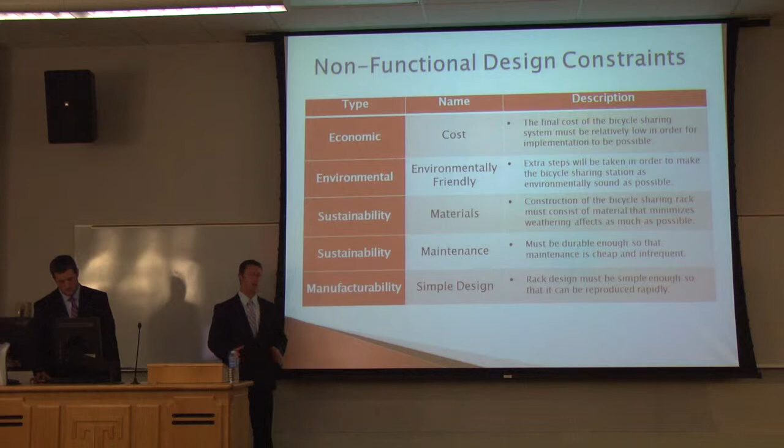Non-functional constraints. Cost is a major factor. We want to keep the cost as low as possible so that the cost to use our program is low, which will encourage customers to use our mode of transportation rather than using a taxi or bus. We will design the rack and the locking mechanisms to be as durable as possible to make maintenance as infrequent as possible and to lower the maintenance cost. The design of the rack will be made simple so that they can be mass produced, because we'd like to place several of these all over the city.

Major challenges and risks. The two largest challenges in a bicycle sharing program are deterring vandalism and deterring theft, because if we do not do this, then the success of this program will be in major question. The location of the bicycle racks will have to conform to all the Philadelphia zoning regulations. Competition from other forms of transportation: like I had mentioned, we need to keep the costs down so that people will be encouraged to use our rented bicycles rather than go out and buy their own.

Here is our design block diagram. As you can see up top, first we need to determine the exact design of the bicycle that we will use. Once we've done that, we can begin to determine locations around the city where we can place these bicycle racks.

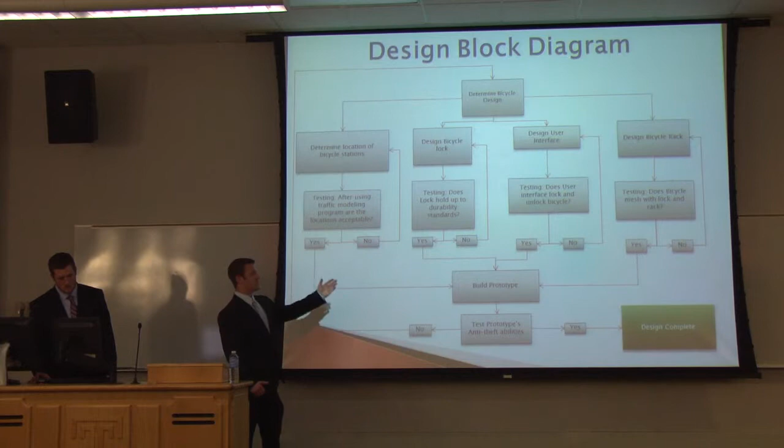We can then finalize the design of the bicycle locks, the user interface, and the bicycle rack. Once we finalize that, we can begin testing these components individually, and then depending on how the test goes, we can then put it together and build a prototype, and then begin to test our prototype.

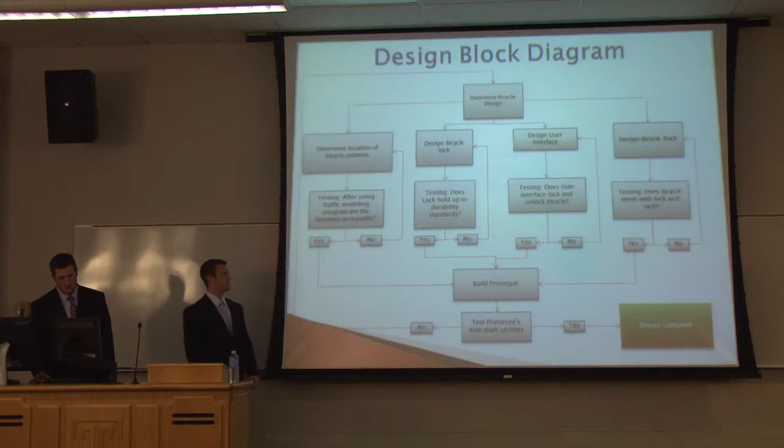This is just a quick overview of how the program will work. Customer will approach the bicycle sharing station, has the option to use a credit card or an RFID scanner for more frequent users. The bicycle will unlock from the bicycle rack.

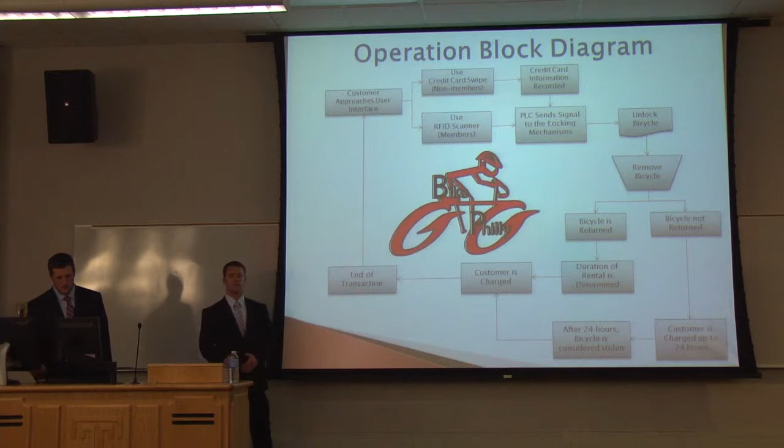Once the bicycle is returned and locked in the rack, the customer will be charged for the duration of their rental. If the bicycle is not returned within a 24-hour period, then the customer will be charged the full price of the bicycle to ensure that they bring the bicycle back.

Like I mentioned earlier, we will use a fixed speed bicycle. Why are we going to do that? Well, like I said, it's very simple, and it completely gets rid of the potential of gear issues that we may have in the future. Also, the nice thing about the simplicity is any user, young, old, or of any bicycle riding experience will be able to handle our bicycles.

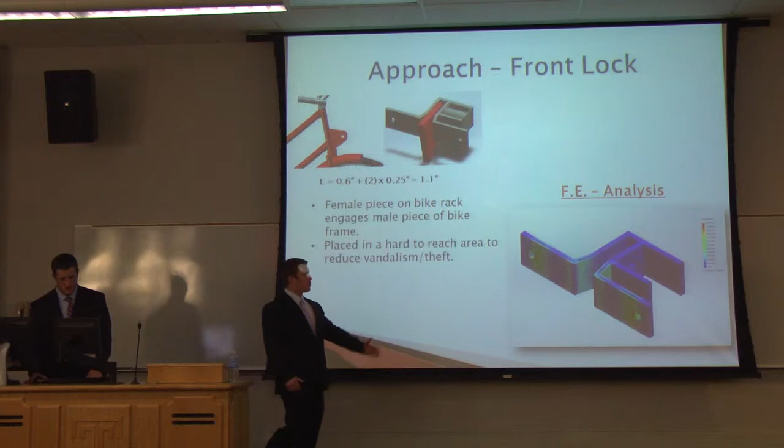We've done a SolidWorks simulation on the front lock mount as well. We placed a 300-pound load on the deadbolt to simulate a person applying 300 pounds on the bicycle, trying to remove it from the rack, and the mount has held up.

Here is the solenoid that we have chosen to use. It is powered by a 24-volt DC signal, which is compatible with our PLC. It has a 1-inch stroke; we chose the longer stroke so that we could use a thicker plate on the front of the bicycle to allow for higher security.

Like I mentioned earlier, the life of the locks will be 73,000 cycles. That's 365 days in a year, times 10 years, times 10 uses a day, times 2 to account for the locking and the unlocking of the bicycle.

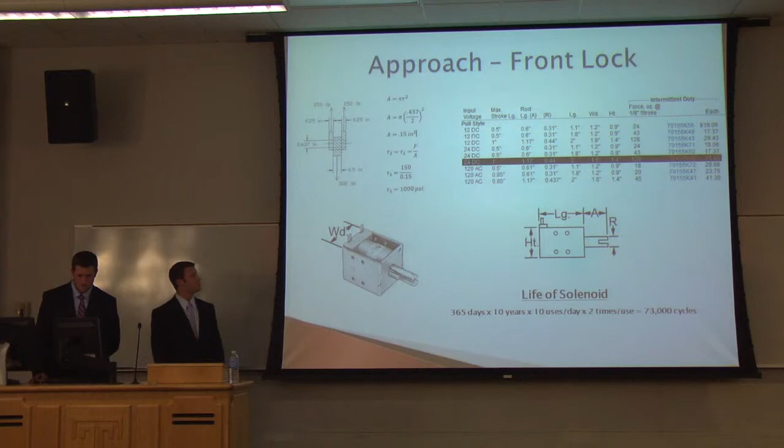Once the unlock signal has been given, the solenoid will retract the pin and the arm will be able to move to the unlock position. We found a weak point in the rear lock assembly. At this point, we calculated the resultant force of someone using a 2-foot crowbar to try to pry the L-shaped arm back and release the bicycle. That force came out to be a little over 4,000 pounds, so we ran a SolidWorks simulation.

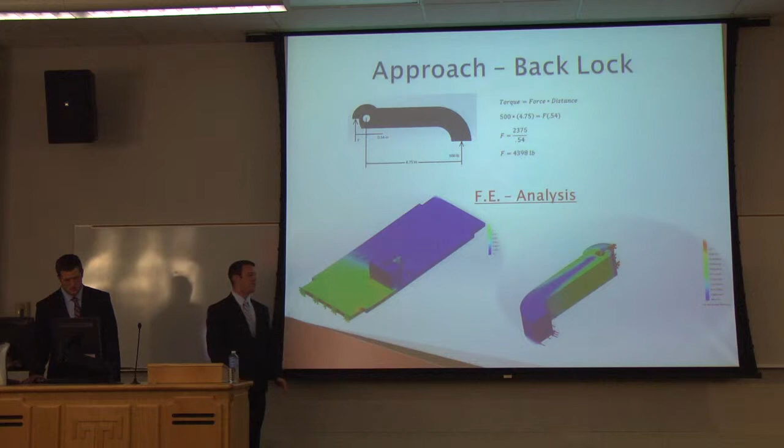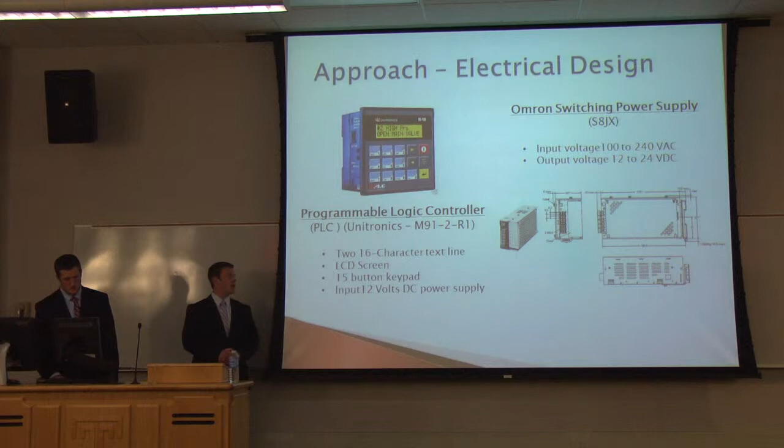The brain of our user interface will be a programmable logic controller, or PLC. The reason that we chose this PLC was because it already has a screen and a keypad on it, so we don't need to worry about attaching those. And this will provide us with our locking and unlocking processes. Here we have our radio frequency identification, or RFID, and credit card swipe. This is how the customer will pay for their rental.

Traffic modeling. The traffic modeling will be done on existing bike paths and major city streets. The program that will be used is called VISSIM. The traffic modeling will show the effect of having an increased amount of bicycles on city streets.

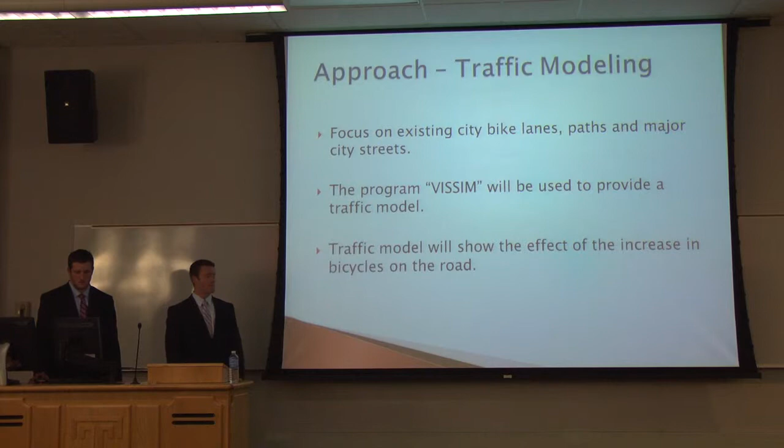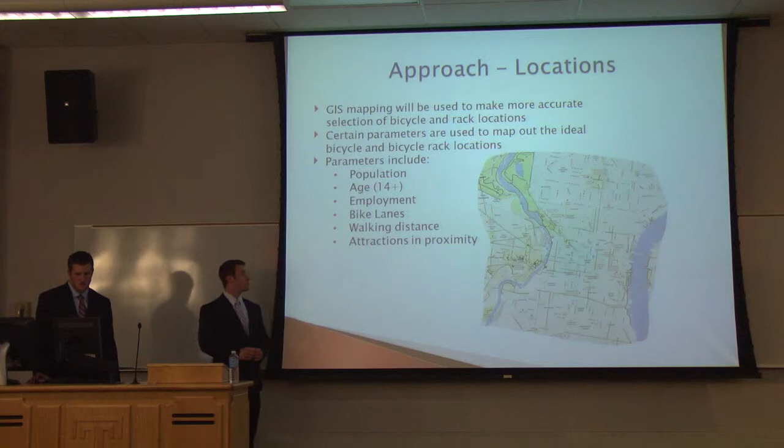Locations. Our program will run as far north as Temple Hospital, south to the sports complex, east to Penn's Landing, and west to University City. We will focus on placing these racks in key locations around universities and hospitals because of the higher population. GIS mapping software will be used to help make a better selection for where we should place these bicycle racks. Certain parameters will be used to help us find the ideal locations around the city. Parameters include population, age, bike lanes, etc.

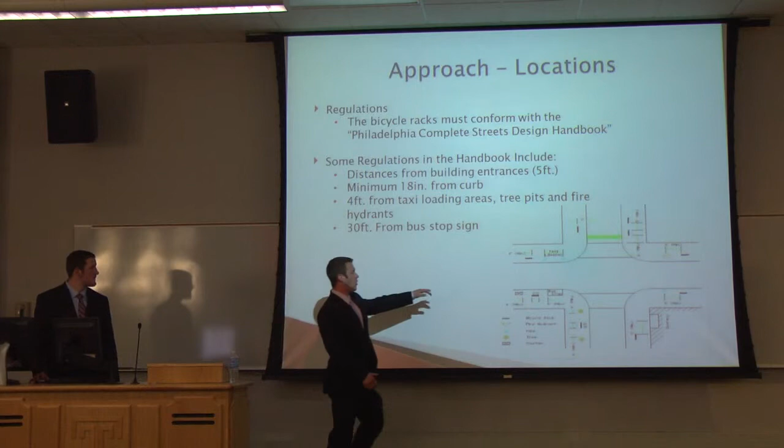All the locations of these bicycle racks have to conform with the regulations set by the Philadelphia Complete Streets Design Handbook. These regulations include distances from things like taxi loading areas, tree pits, bus stops, etc. Right here we have a map. These green bars you can see here, those are possible locations where bicycle racks can be placed.

Summary. For the remainder of Senior Design 1, we would like to make a trip to either New York City or Washington, D.C. so we can get a first-hand look at existing bicycle sharing programs to help us manufacture ours. We'd like to finalize the design of the bicycle locks, the rack, and bicycle itself, begin designing the test, and start ordering components. That way, in the summer of 2013, we can build our prototype, which leaves testing for Senior Design 2 and any necessary modifications that may have to be made.

Any questions? Have you looked at luggage carts in the airport? They use basically a credit card swipe, right? You swipe, you can get one. You said the carts? Yeah. Oh, the luggage carts. Oh, they use a credit card swipe? Yeah, same idea. Have you looked up the design? No, actually, we haven't thought of that. That's something we will look into. Yeah, I think what you do will be very similar. Yeah, that's a good idea.

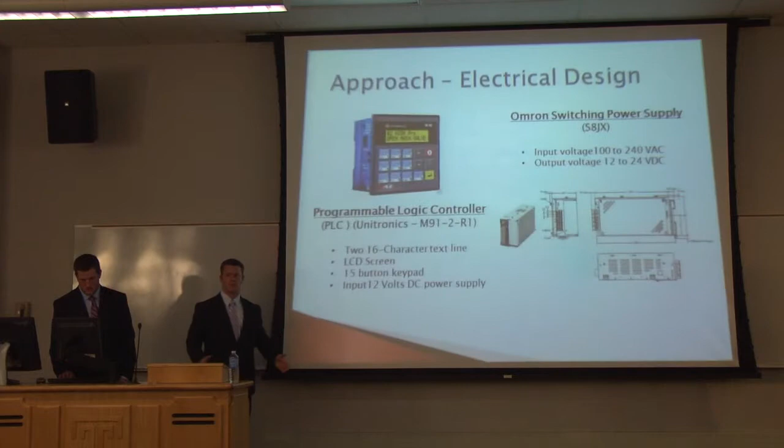I have a couple questions for you. You go back to your original, say, 500 pounds load. Right. Where do you come up with 500 pounds load? Well, we just assumed they'll be located in popular city streets, so I'm assuming that people will be sitting on them. So we just accounted 2 people sitting on a bicycle rack, roughly 500 pounds. Now, we did run simulations, I believe we went up to 3 tons on this bicycle rack, and there was some displacement, but for the most part, the rack stayed completely fine.

So when you did your analysis, you assume 500 pounds is evenly distributed? Yes, for the SolidWorks analysis, that's a distributed load. You know, it's totally different when you have 500 pounds in a local load concentration versus 500 pounds spread out. Spread out, right. Okay, that's something we will look into, doing a concentrated load of 500 pounds rather than a distributed load. Any more questions?

I am assuming that every bike will be identified with an RFID code. Is that what it is? That's still something we're looking into. We're not sure how we're going to tackle that yet. We will need something to identify who's returning the bicycle. Like I said, I don't have a real good answer for you right now. It's something we're going to have to consider. Okay, but suppose that someone takes a bike from one rack and puts it on the other rack. There will be interconnected systems.

How about the electronic payment? Basically card swipe, and that's what we will do for the purpose of our project. We're not really going to focus on that. We're going to focus on the rack design and the locks, and the RFID scanner and the credit card will simply be a simulation of how it will work. So it will not be implemented? Yeah, it will not be implemented. The payment process will not be.

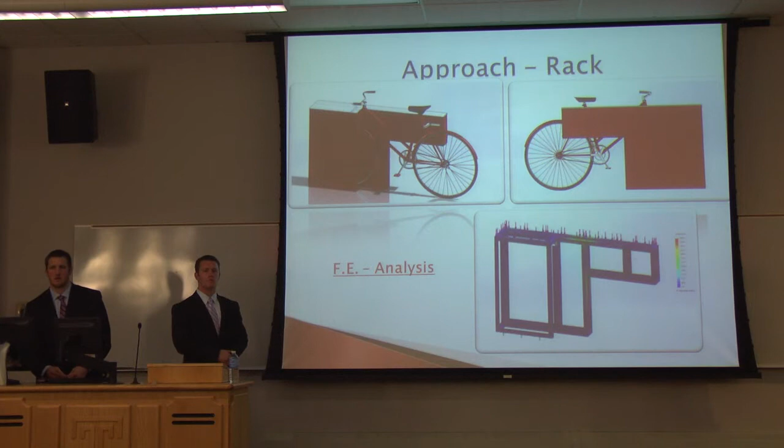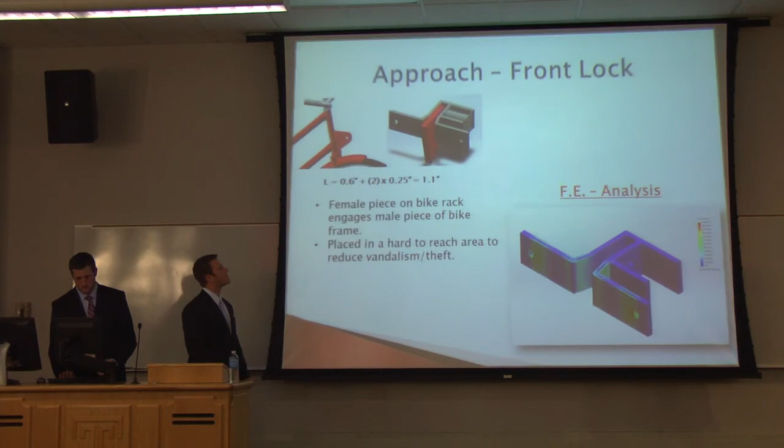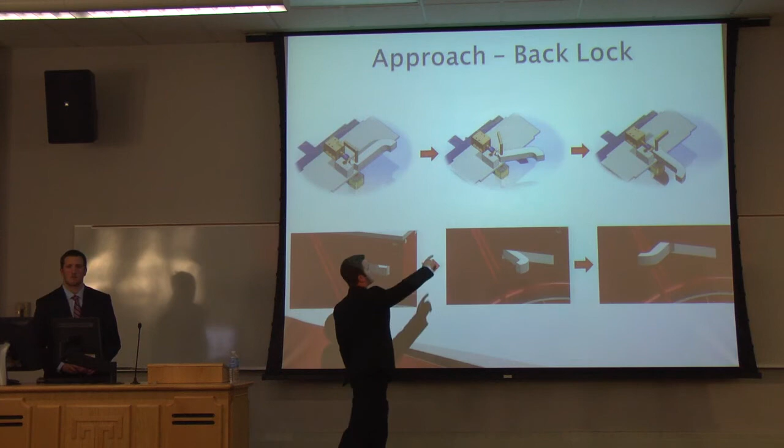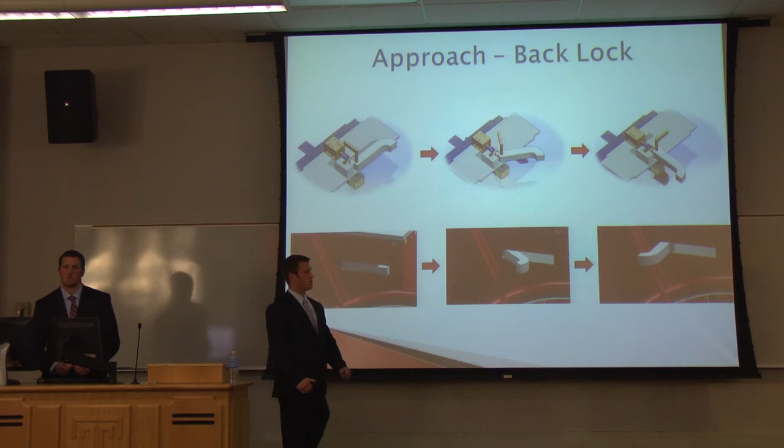Actually, I'm really confused by your solenoid controlling your arm and also the pin. For the rear lock? Yeah, you have one solenoid to control both pin and the arm. Yes, over here. Down at the bottom, there is a motor that will provide the rotation, and the solenoid will be spring-loaded so its natural position will be extended. So once the arm turns to the locked position, there's a notch cut out in the arm, and that will prevent the arm from being turned backwards. Once the solenoid is powered, that pin will be retracted and will allow the arm to turn. So you have the solenoid and a separate motor. Right. I apologize, we have